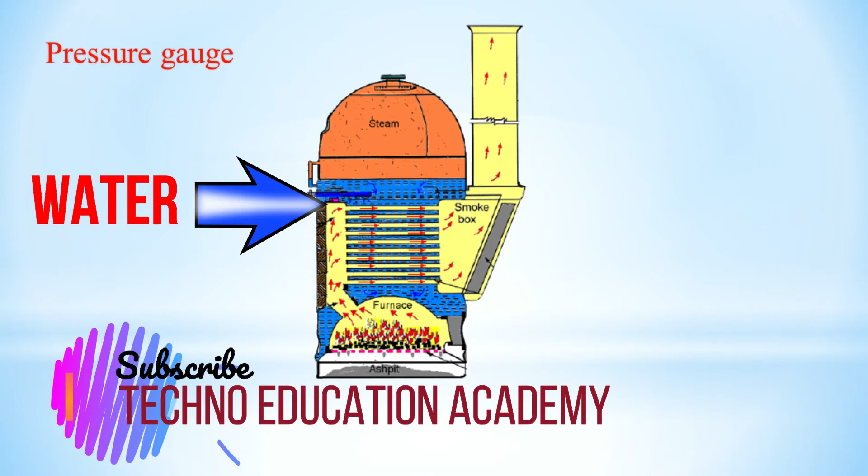So pressure gauge is a mounting, a necessary part in the boiler. The function of a pressure gauge is to measure the pressure exerted inside the vessel. As we know, in a boiler shell, at the bottom side the water is there, which density is higher than steam, and at the top side the steam will remain present.

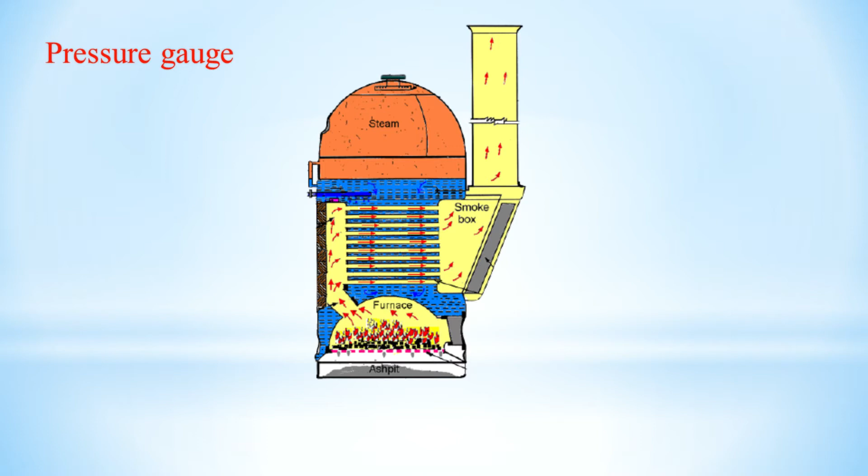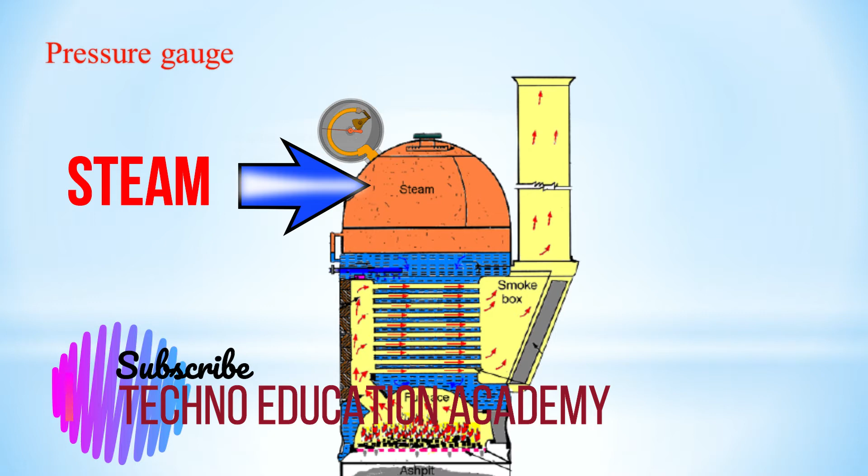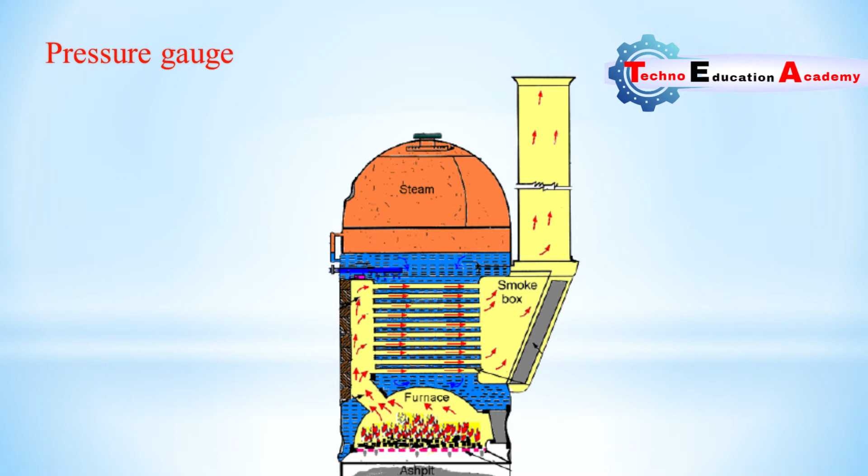As we have already discussed, in a shell, top side the steam will remain, and bottom side of the vessel the water will remain present, and steam will occupy more space and its pressure is higher. So for safety purpose we need to measure the pressure of the steam. For that purpose we use a pressure gauge, and it is fitted to the steam space of the boiler shell with the help of an inverted siphon.

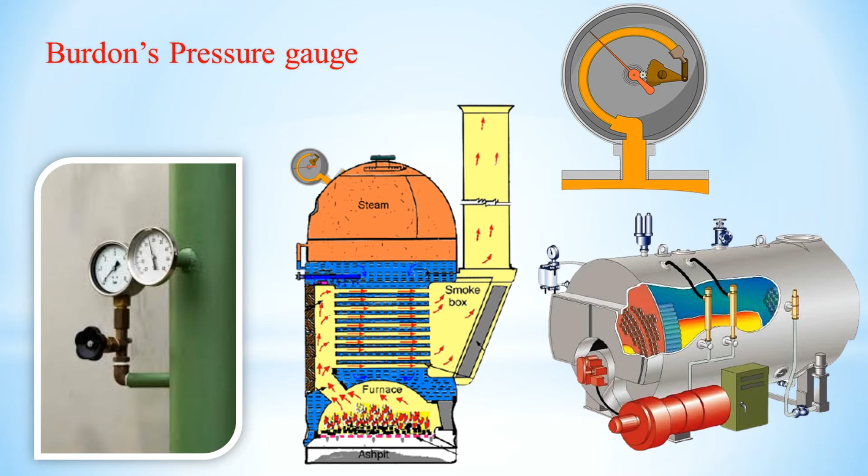It is usually constructed to indicate up to double the maximum working pressure for safety purpose. Its dial is graduated to read the pressure in bar or PSI. PSI means pound per square inch. Both are units of pressure, which is more than atmospheric pressure, which is called gauge pressure.

The siphon of the gauge is always full of water, or we can say it is full with condensed steam. The water in the U-tube siphon prevents the steam from coming in contact with the spring tube. This will reduce overheating and thermal stresses in the spring tube. As we know, thermal stresses are due to the temperature difference. So this reduces overheating and thermal stresses in the spring tube because of the presence of water in this U-tube siphon.

A three-way cock is provided for connecting the boiler pressure gauge to the steam space. Here you can see this is a three-way cock and its connection.

Now we will discuss the construction and working of the Bourdon tube pressure gauge. It consists of a Bourdon spring tube ABC. It is made up of copper and bent into a circular shape. This tube has an elliptical section. The end A of the tube is plugged.

The other end C is connected to the hollow block E. Here you can see this is a hollow block E. The lower portion of this block is threaded, and the block E has a small opening for the entrance of steam or water from the boiler.

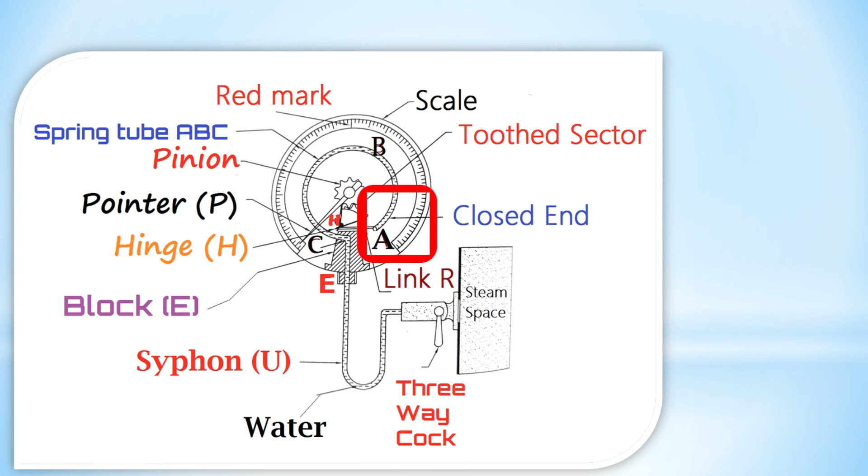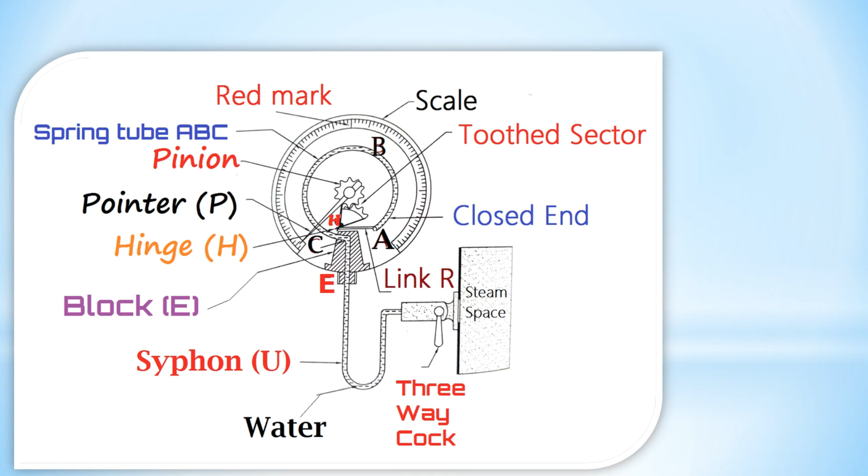Now we will discuss the working principle of the pressure gauge, how it works. The movement of the free end of the elliptical tube is proportional to the difference between external and internal pressure on the tube. Since the outside pressure on the tube is atmospheric, the movement of the free end is a measure of the boiler pressure, which is above atmospheric pressure, or we can say gauge pressure.

The pressure gauge is connected with the boiler steam space through a U-tube siphon, and the U-shaped siphon pipe contains water which fills the Bourdon tube. The pressure of the steam acting through the water on the inside of the tube tries to make the tube circular.

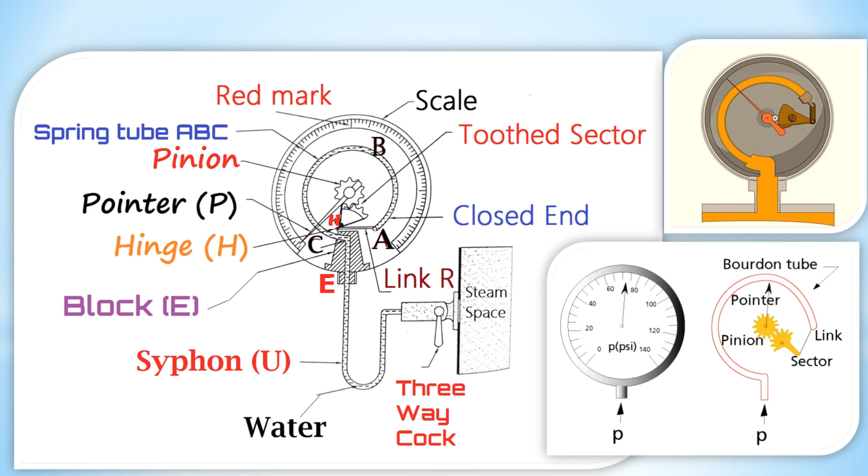One end is fixed and the other end movable. Here you can see the one end is fixed and the other end is free. So the movement at the free end is proportional to the difference of pressure. Because of the pinion and gear arrangement, the slight movement of the Bourdon tube is magnified considerably, and the pointer gives a maximum deflection which can be read on the scale.

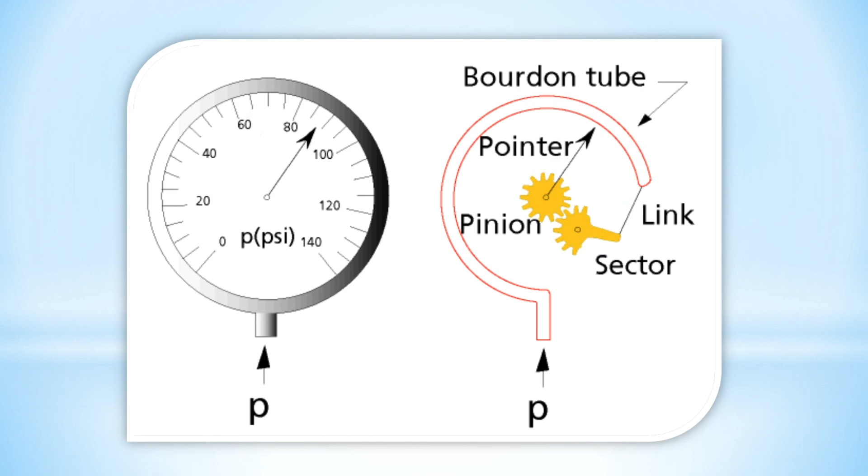So this is the working principle of pressure gauge. I hope this content will be helpful to you.